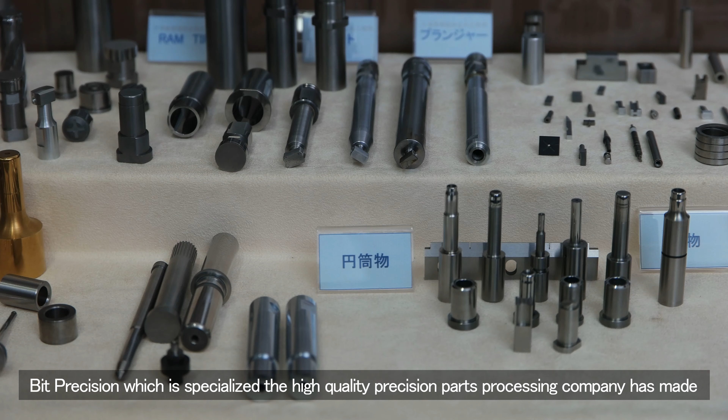Bit Precision is a specialized, high-quality precision parts processing company that has made wear-resistant tungsten carbide tools, jigs and tools for molds through a grinding process, and we have provided them to domestic and overseas markets.

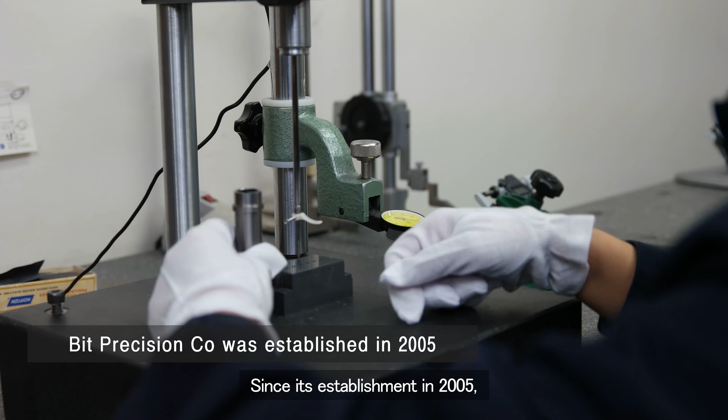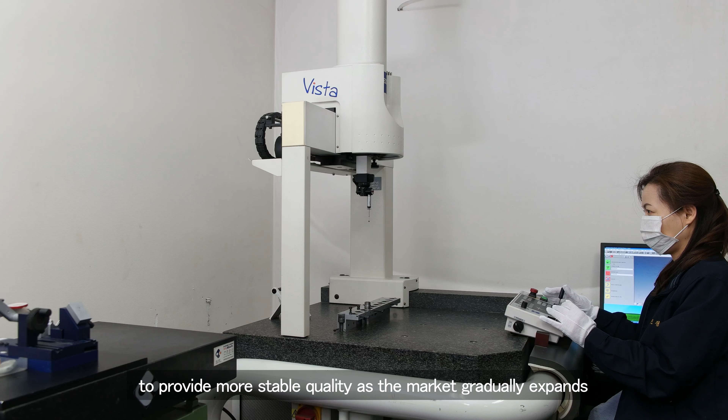Since its establishment in 2005, we have actively broken into overseas markets and have secured a dedicated measurement room with constant temperature function all year round to provide more stable quality as the market gradually expands. We have also improved measurement accuracy by introducing a three-dimensional measuring machine.

In addition, we have increased the number of parts items through cooperation with in-house processing and cooperators. By the end of 2015, we had 17 clients in Japan and 2 in China.

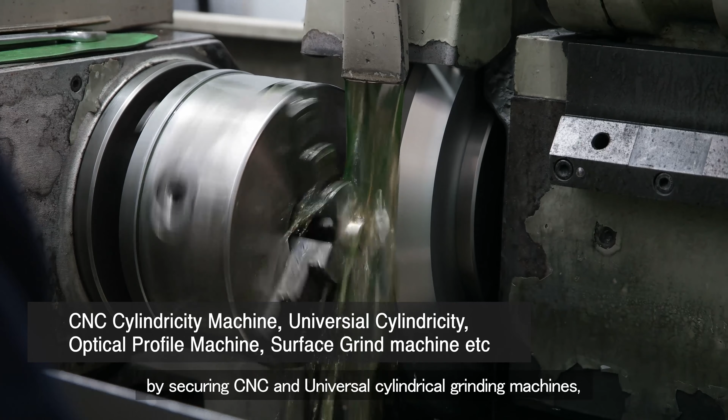We are growing as a professional manufacturer of precision parts processing by securing CNC and universal cylindrical grinding machines, optical profile grinding machines, and surface grinding machines, as of the end of June 2019.

We have introduced a new cylindrical grinding processing method. The working process using the existing universal cylindrical grinding machine was very hard work because it required positioning by turning the handle every moment by hand.

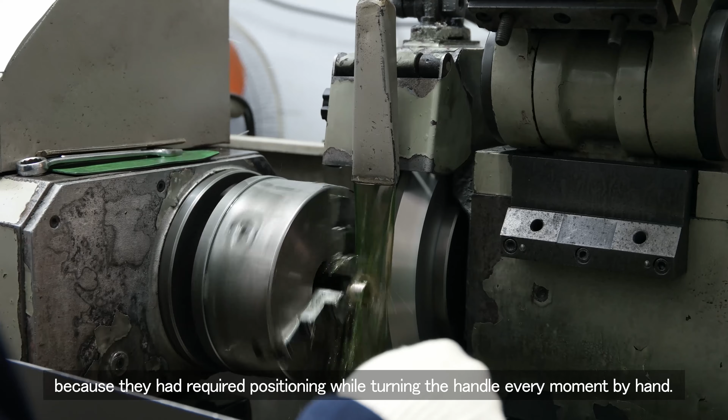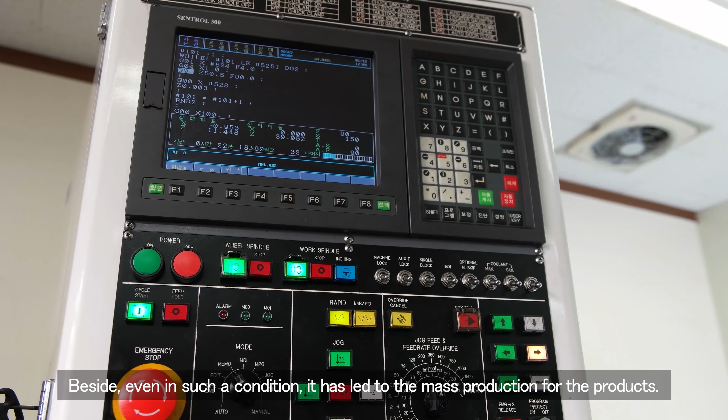Therefore, we have developed a cylindrical grinding method by CNC control, and with the G-code command, the processing has been automated and has increased precision to the micron degree. Even with micron tolerance, it has led to mass production for the products.

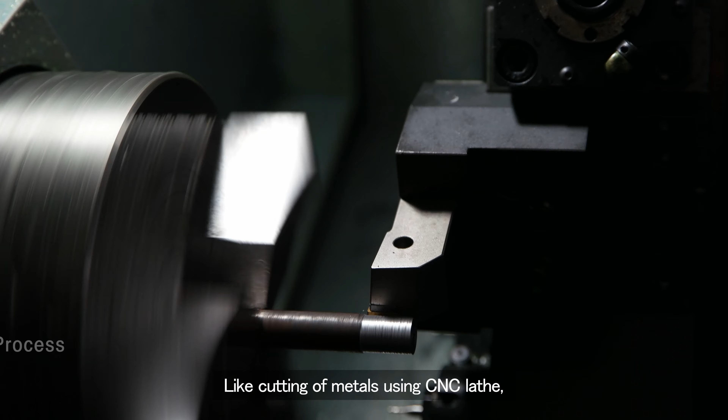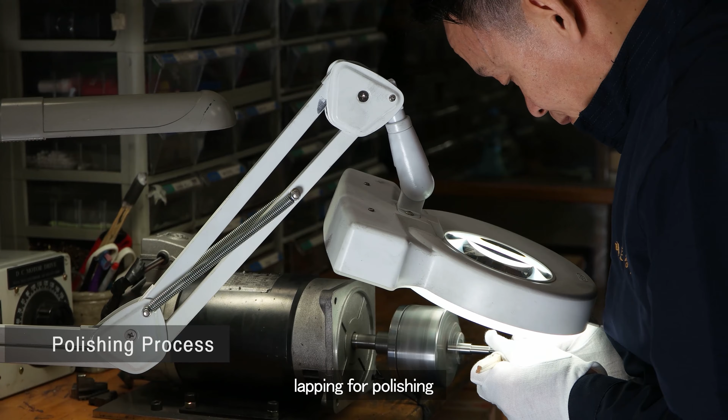Along with this, we have expanded the scope of precision processing through cooperation with subcontractors, such as cutting of metals using CNC lathe and machining center, cylindrical and profile grinding, surface and honing grinding, lapping for polishing, WEDM for cutting, and EDM for forming and drilling.

We have supplied the demand for precision products in small quantity lots with various specialized processing technologies in this area.

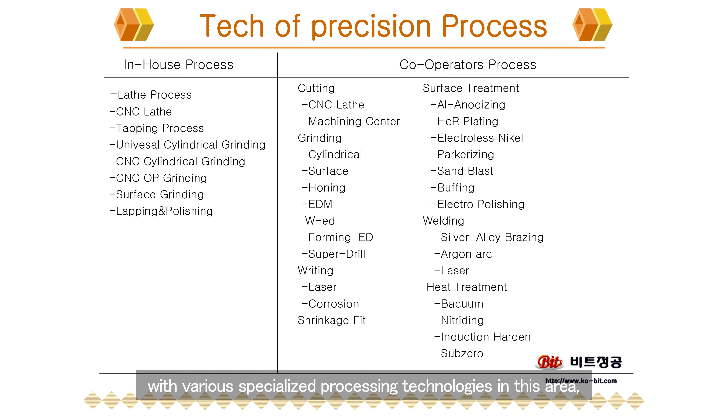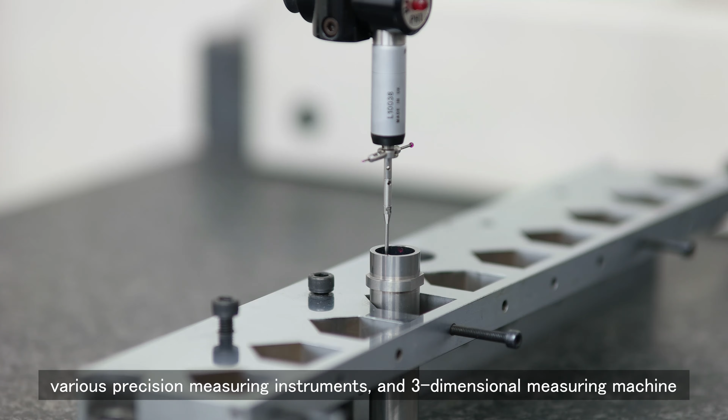We have a dedicated measuring room with constant temperature control and various precision measuring instruments and a three-dimensional measuring machine, and also issue inspection reports about precise tolerances. We can provide even geometrical tolerances, including concentricity, if necessary.

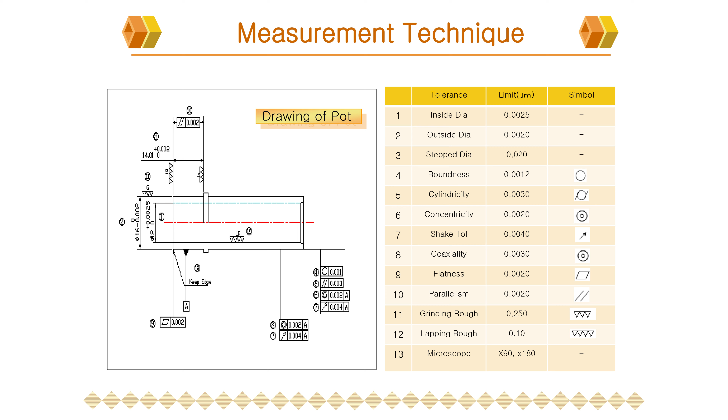Our major products are used in the molds of the semiconductor assembly process, and tungsten carbide parts are used in the molds of air conditioning units and in making motor cores. Also, various wear-resistant tools for automotive parts processing.

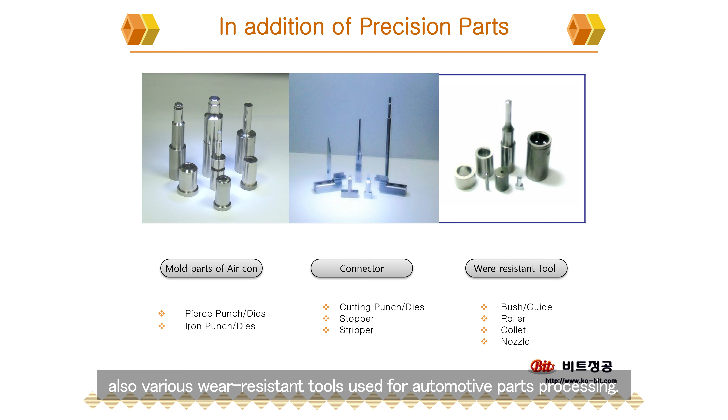The whole staff of our company will continue to grow into a world-renowned small giant company through precision parts processing with constant passion and challenge.